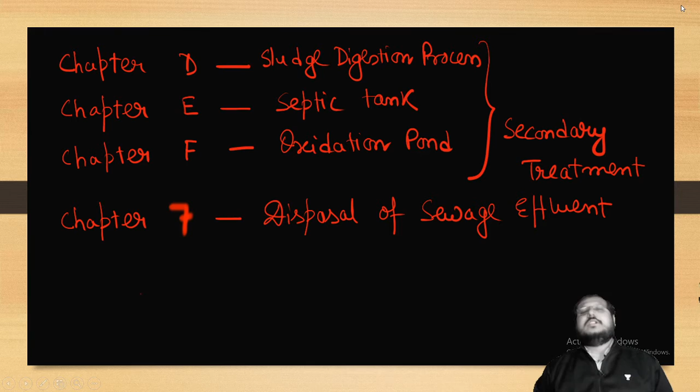So in this class we will discuss primary treatment completely, and we'll also go to a segment of activated sludge process. Let's go for the primary treatment.

What is primary treatment process? Primary treatment process comprises of screening, grit chamber, skimming tank, and primary sedimentation.

So what is screening? Screening is the first unit operation encountered by wastewater where large floating objects such as waste paper, plastic, cloths, glass bottles, wooden pieces are getting removed. That means it is actually nothing but a sieving process.

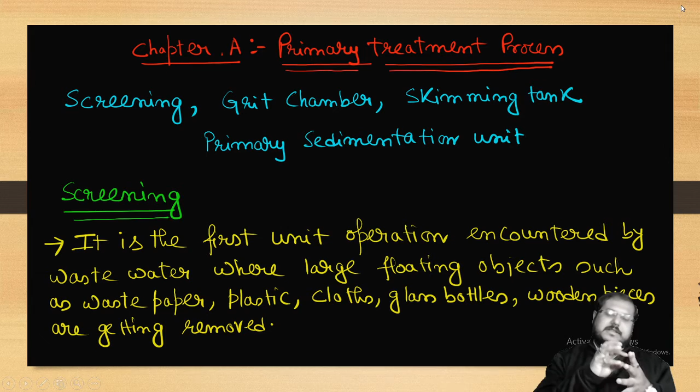When water is flowing, whatever the bigger size particle which is having higher pore size, higher diameter than the pore size will get restricted from the flow. It is the first unit operation encountered by wastewater where large floating objects such as waste paper, plastic, cloth, glass bottle, wooden pieces are getting removed. That is all about the screening process.

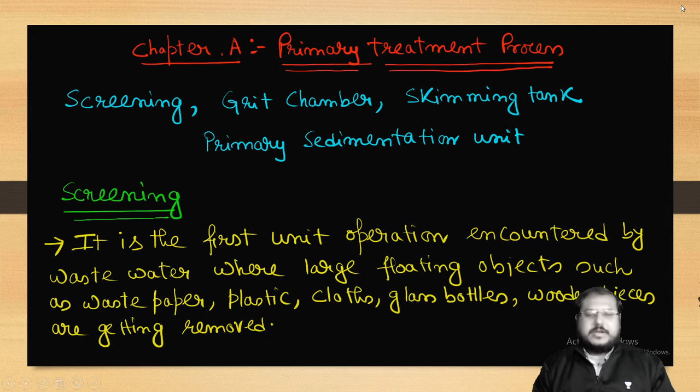Now, if they are not removed, then they will cause choking or clogging problem.

Screens are devices provided with uniform size opening, meaning if it is a screen, all the opening sizes will be same, and it is made up of metal rods or bars.

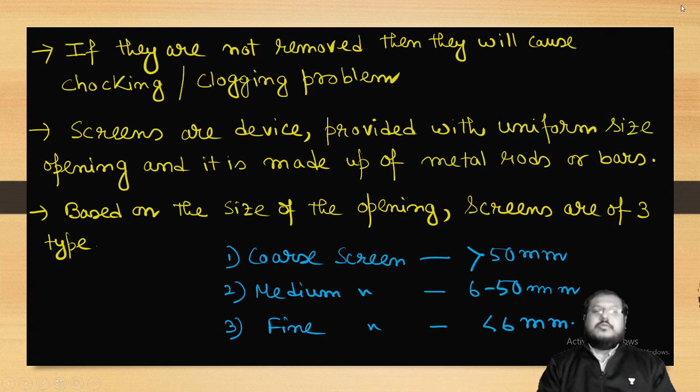Based on the size of the opening, screens are of three types: coarse screen greater than 50 mm diameter, medium screen 6 to 50 mm diameter, and fine screen less than 6 mm diameter.

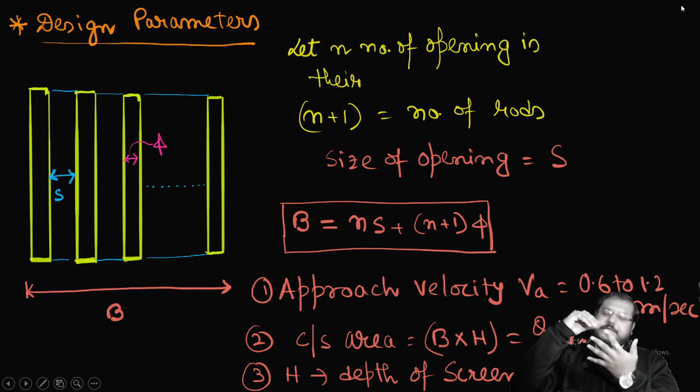Going for the design parameter: suppose n is the number of openings. So if your hand is a screen, here the number of openings is 3, but the number of rods is 4. If n is the number of openings, n plus 1 will be the number of rods.

The size of the opening is defined as capital S and the diameter of metal rods is defined as phi. So B, the width, equals to n into S plus n plus 1 into phi.

n is the number of openings, and n plus 1 is the number of rods, multiplied by phi. That also gives you B.

Approach velocity VA will be in between 0.6 to 1.2 meter per second. Cross-sectional area B into H will be equal to Q by VA. Depth of screen will vary in between 0.8 to 1.1 meter.

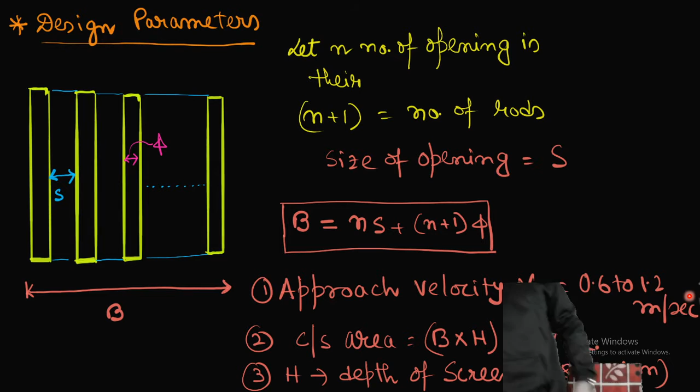So cross-sectional area B into H will be equal to Q by VA, where H is the depth of screen, which will vary in between 0.8 to 1.1 meter.

The separation velocity, defined as Vs, is the velocity at which the water moves away from the screen, that is defined as Vs.

The head loss due to the screening process will be defined as Vs square minus Va square by 2g into 1 by 0.7, where this 1 by 0.7 is called the screen parameter. As we know Va equals Q by cross sectional area, that is Q by B into H. Now what will be Vs? H, depth of screen, will be fixed, but B should be B dash. Now the question is, is B dash equal to B?

The answer is that B dash is not equal to B, because B dash is Ns. Why? Because when water is getting separated from the screen, it is only getting separated from the pores, not from the rods. So the total depth of the pores, depth meaning here B, with the pore will be B dash. So Vs will be equals to Q by N into S into H.

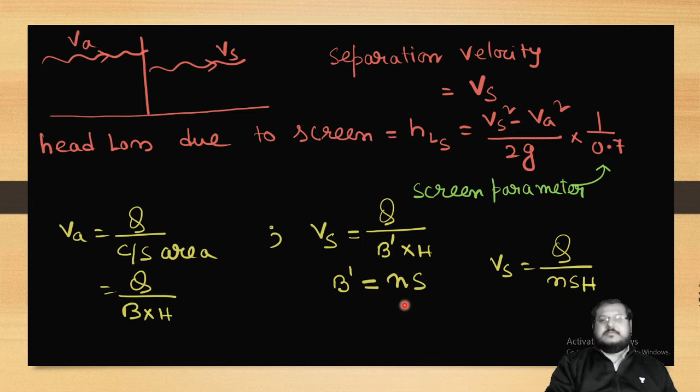Sometimes screens are provided with some angle theta. Why? Because if it is provided with some angle theta, then the modified separation velocity Vs will be Q sin theta by NSH. Why do we say this? Because when Vs becomes Q sin theta by NSH, the modified Vs value will be less than the original Vs, because the modified Vs has sin theta multiplied with the original Vs.

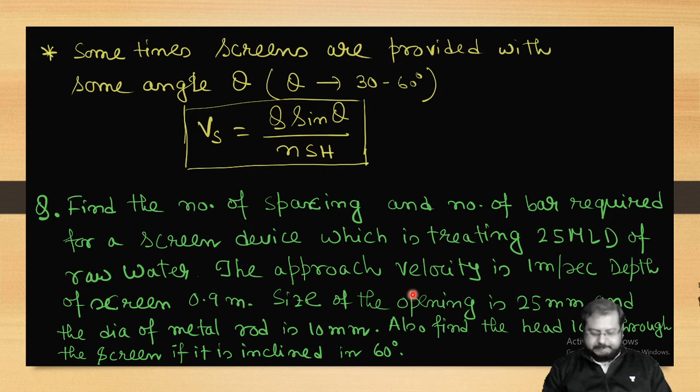Let's see the solution process.

HL is VS square minus VA square by 2G. VS is Q sin theta by NSH. So HL comes out as 0.0384 meter. Okay, that's it.

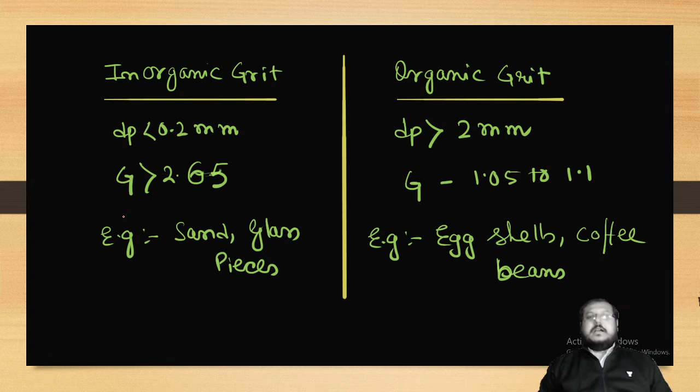The difference is: for inorganic grit, DP will be less than 0.2 mm, for organic grit DP will be greater than 2 mm. Specific gravity G will be greater than 2.65 for inorganic grit, and organic grit G will be between 1.05 to 1.1. For inorganic grit, examples are sand and glass pieces. For organic grit, examples are egg shells, coffee beans, etc.

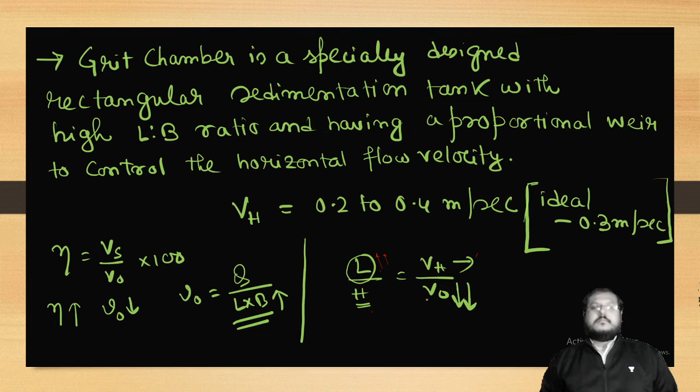The L/B ratio is generally varied between 6:1 to 8:1. Detention time will be between 1 to 3 minutes. Height of the tank will be between 2 to 4 meters, and volume of tank will be defined by Q into dt.

Q into dt is volume of tank, and length of tank will be given by VH into dt, horizontal flow velocity into retention time. It is volume of tank.

What have we seen so far? We have seen Hazen's equation for settling velocity in the laminar flow region, and modified Hazen's velocity in the transitional flow region. Now we are observing the modified Hazen's equation for the grit particle. Is that clear?

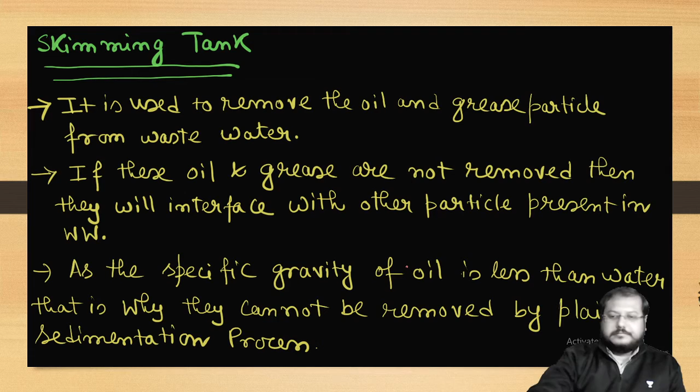In skimming tank, hot air will be blown from the bottom of the tank, which will take the oil and grease particles to the top of the water surface as gas bubbles.

Now, the surface area of skimming tank. Here a flotation technique will be used. The surface area of skimming tank will be given by AS = 0.00622 Q by VR.

In skimming tank, hot air blown from the bottom takes the oil and grease particles to the top as gas bubbles. Here Q is the wastewater flow rate in meter cube per day, and VR is the liquid rise velocity in meter per minute. Retention time of the skimming tank will vary between 3 to 5 minutes.

Retention time for the skimming tank will vary between 3 to 5 minutes.

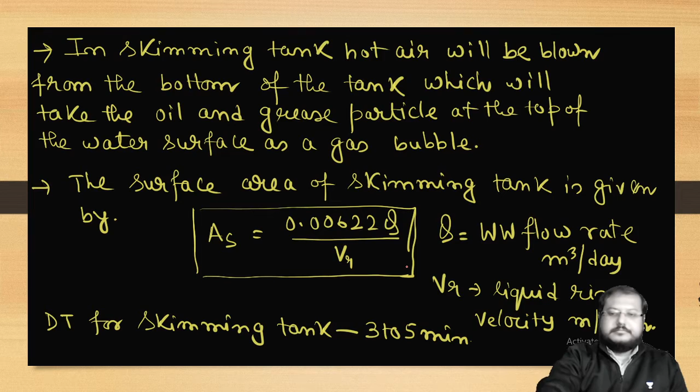The next component of primary treatment is: after completion of all preliminary treatment, the water is transferred to a sedimentation tank called the primary sedimentation unit for a detention period of 2 to 3 hours.

What will happen in this unit? Type 3 settling, or hindered settling, will be observed. As the particles are hindered particles, they continuously change their shape and size and are brought down to the bottom as hindered particle, type 3 settling.

That is all about the primary sedimentation segment. We have quickly finished this because it is only the prelude of the wastewater treatment process.

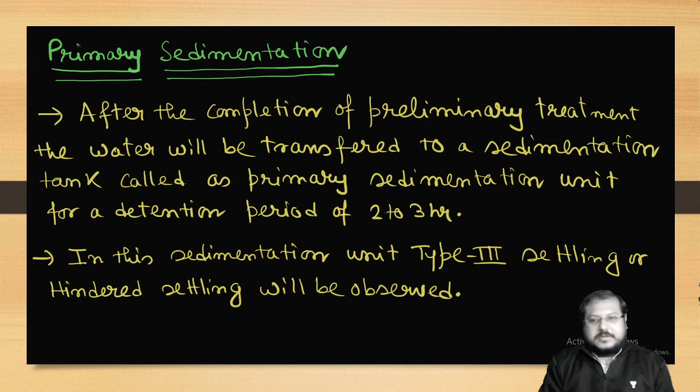Next we will go for the activated sludge process. This is biological treatment, a major treatment process - the biological treatment process.

In the biological treatment process, complex matter will be acted upon by microorganisms, which will give you gases, energy, H2O, and biomass. These microorganisms are heterotrophic microorganisms. What is a heterotrophic microorganism? Those microorganisms which cannot produce their own food.

If a microorganism can produce its own food, it will be called an autotrophic microorganism. The complex acted upon by microorganisms will give gases, energy, H2O, and biomass. What is biomass?

The question is, what is biomass? Biomass should ideally be the dead cells of microorganisms, but actually it is the summation of dead cells and living cells that remain - the percentage of dead cells should be more, but ideally it should be all dead cells, though actually it's dead cells plus living cells.

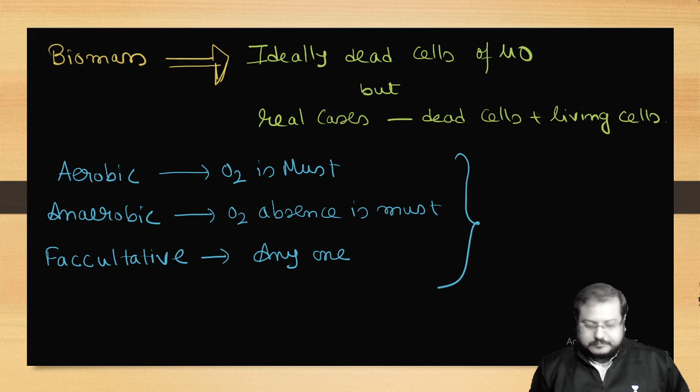This decomposition process will be of three types: aerobic, anaerobic, and facultative. In aerobic, oxygen presence is a must. In anaerobic, oxygen absence is a must. And in facultative, either of these can happen.

In the aerobic process, complex is acted upon by microorganisms in the presence of oxygen, producing carbon dioxide, water, energy, and biomass. Whereas in the anaerobic process, complex is acted upon by microorganisms in the absence of oxygen, producing methane, ammonia, H2S, and energy.

The aerobic process is a fast process, whereas the anaerobic process is a very slow process. We know that whatever is fast will be less efficient. So the anaerobic process is slow, but it is more efficient.

This aerobic process will be of two types: suspended growth process and attached growth process. In the suspended growth process, you can take the example of making tea from a tea bag.

We put the tea bag in suspension with hot water or hot milk. The tea leaves are in suspension with the hot water or milk, and then we get the liquor. That is the suspended growth process.

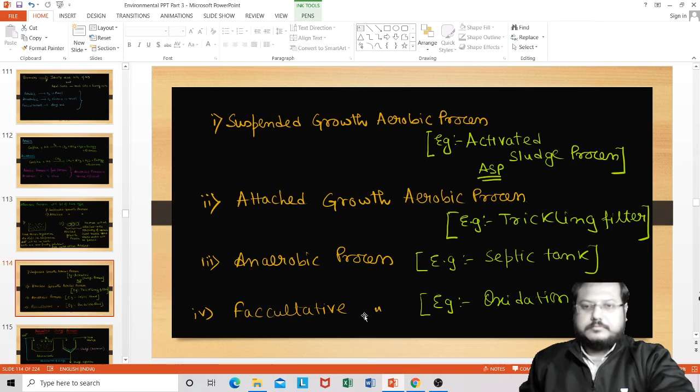We are going for the activated sludge process.

First of all, in activated sludge process, there will be a tank called the aeration tank, which is an example of a suspended growth aerobic process. The microorganism mass will be in suspension and oxygen will be supplied from outside. Wastewater is kept there, and after a certain time, it is transferred to the secondary sedimentation tank, where it gets stabilized. From the top we get clear water, and from the bottom we get sludge or biomass. A portion of this sludge is taken out, and part of that moves back to the inlet. The rest goes for sludge digestion. That is the activated sludge process.

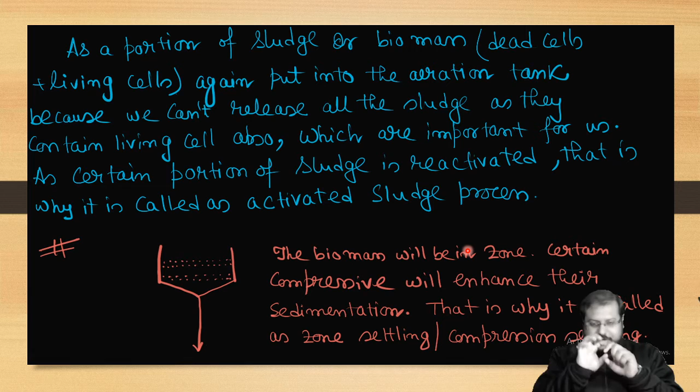If you put extra pressure, it will settle down, like this biomass in zone. A certain compressive force will enhance their sedimentation process.

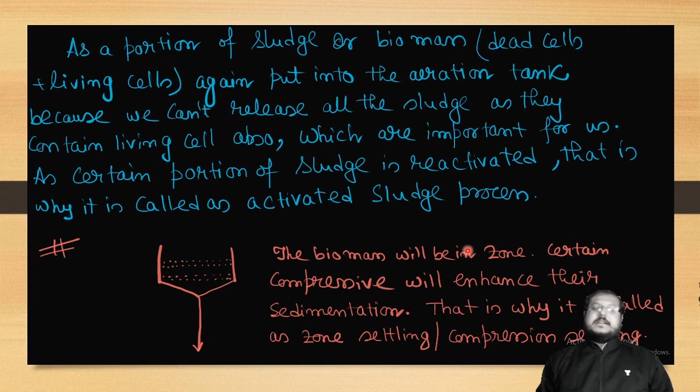That's why this is called zone settling or compression settling, as the biomass will be in a zone and compressive force enhances their sedimentation process.

Now, one thing I should tell you: the way I deal with this activated sludge process, please follow in that manner only. Remember the notation exactly as given - if QR is this, then represent it as QR, not as SR or VR or LR or anything else. First, the schematic is drawn here, and I will explain all these parameters, then move to the design parameters of the activated sludge process.

Before going to that, have a look at this.

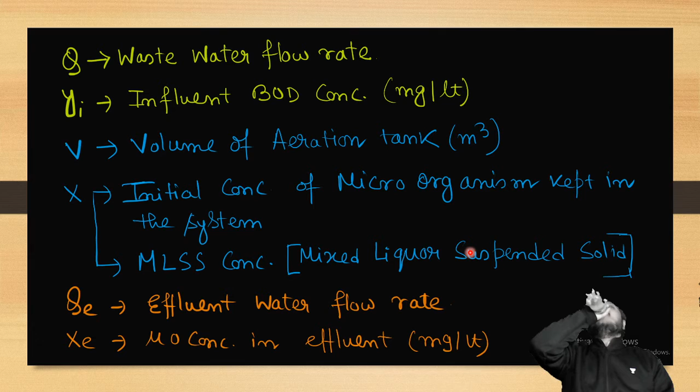X is the initial concentration of microorganism kept in the system, also called as MLSS concentration, because this is nothing but the suspended solid mass mixed with water. That's why it's called mixed liquor suspended solid, or MLSS concentration.

QE is the effluent water flow rate, and YE, since the process is not 100% efficient, is the effluent water BOD. What is XE? A certain portion of microorganism will be there, maybe very less or zero, but there is a chance you can get one or two in the effluent wastewater. So XE is the effluent water microorganism concentration.

Now from the bottom part of the sedimentation tank, you will take out the underwater. QU is the underwater flow rate, and the underwater solid concentration is provided by XU.

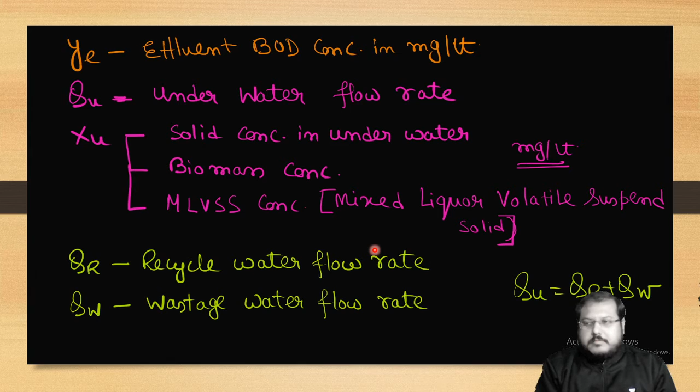Now we are going for the design parameters. First design parameter is F by M ratio, food to microorganism ratio.

What is F by M ratio? It is the mass of food applied to the reactor divided by the mass of microorganism present initially.

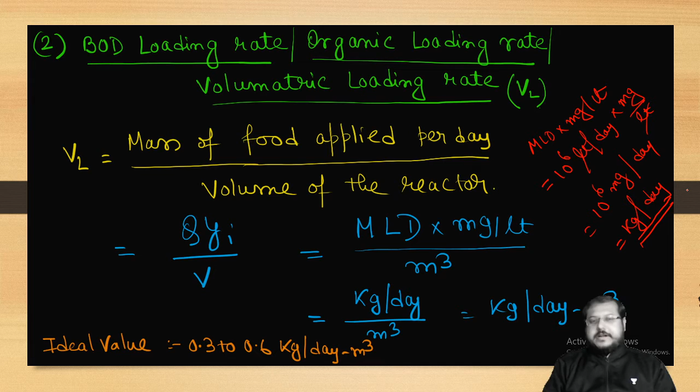MLD into milligram per liter will be kg per day. So Q into Yi is MLD into milligram per liter by meter cube, giving kg per day per meter cube. The ideal value will be 0.3 to 0.6 kg per day per meter cube.

So for F by M, your Q will be in meter cube per day. Then you will be safe enough for the unit conversion.

The third parameter is BOD removal efficiency, defined as Yi minus Ye by Yi into 100. Generally, BOD removal efficiency is written as 85 to 90%, but in practice it will be around 90 to 92%.

Then we go to detention time, defined by V by Q. Detention time will vary in between 4 to 8 hours.

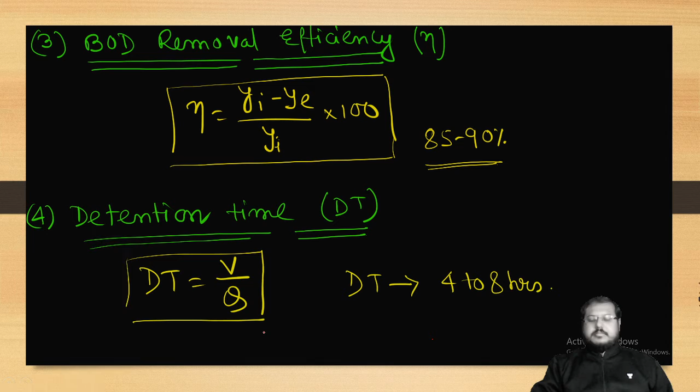Next is mean cell residence time, MCRT, also called sludge age or theta c. It is defined as the theoretical average time for which a microorganism stays in the system.

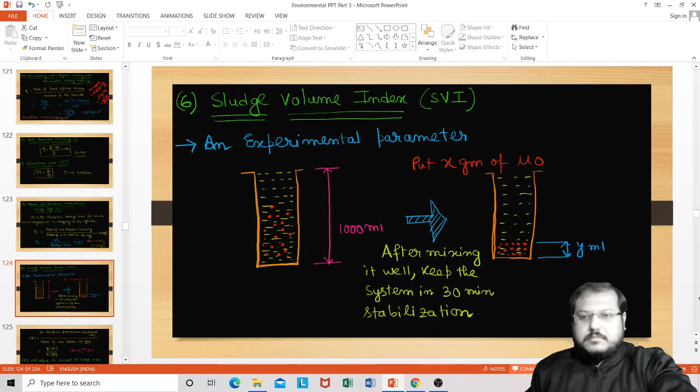The sixth parameter is sludge volume index. It is an experimental parameter, and you need to understand it carefully. It is an experimental parameter and generally cannot be found from the tank itself - you have to experiment it.

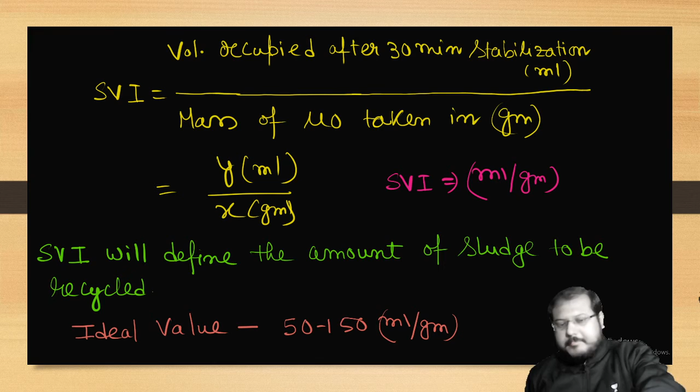Now, how does it define the recycling process? Suppose there is a young microorganism, denoted here in this segment.

One young microorganism is there of mass X. When the same microorganism gets old, this fluffiness will be there. For human beings, fluffiness can be there in the body at any age. But for microorganisms, fluffiness will be there when they grow old and are about to die.

Mass will be same. So in the first case, if SVI 1 is for this microorganism occupying Y1 volume, this is SVI 2, with Y2 by X. So both...

When comparing these two, SVI 1 and SVI 2, since Y2 is greater than Y1, SVI 2 is greater than SVI 1. The higher value of SVI defines what?

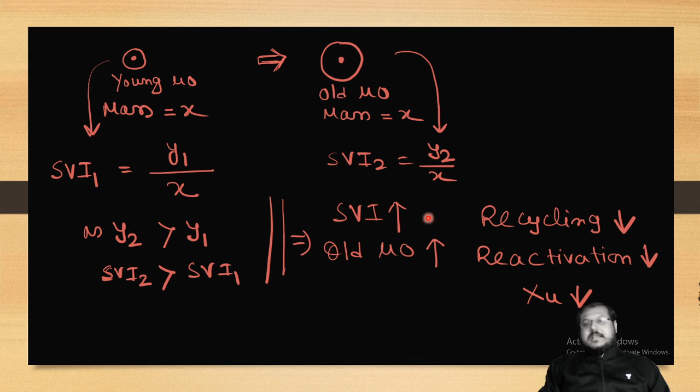Higher value of SVI means old microorganisms are more in the system. So if old microorganisms are more in the system, what is the point of recycling? Since they are about to die, giving them another chance has no benefit. So when old microorganisms are higher in the system, recycling will be less and reactivation will be less.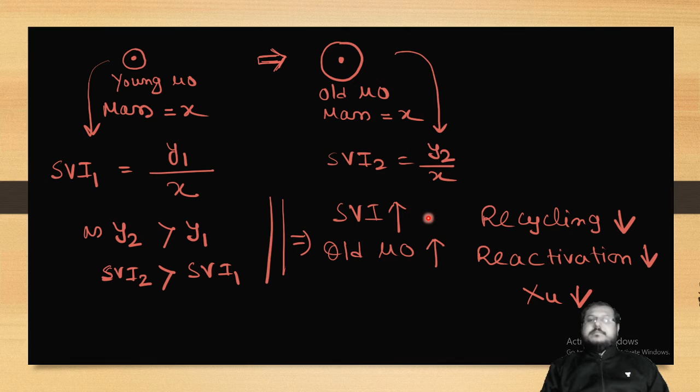When the old value of microorganism is higher, obviously higher SVI will lead to less recycling and less reactivation. Recycling less, reactivation less means recycling concentration XU will also be less. Yes or no? Recycling concentration XU will also be less.

So if XU is less, that means SVI is inversely proportional to XU. XU is in milligram per liter, so 1 by XU is liter per milligram. From here it becomes 10 to the power 6 milliliter per gram, which is the SVI unit. So we write SVI equals 10 to the power 6 by XU.

Now the term recycling ratio R is defined by QR by Q. Mathematically, R equals X by XU minus X, or X by 10 to the power 6 by SVI minus X. Generally, R value varies between 0.25 to 0.5.

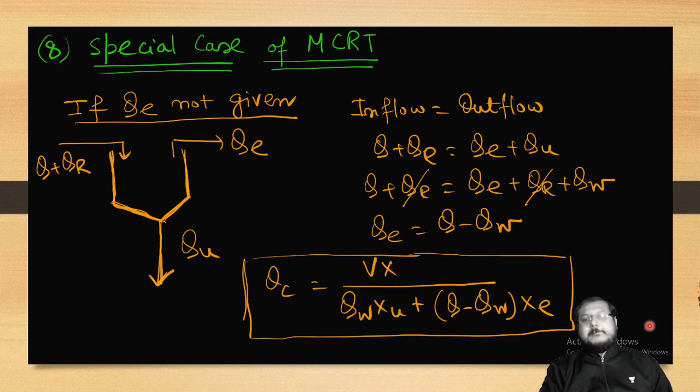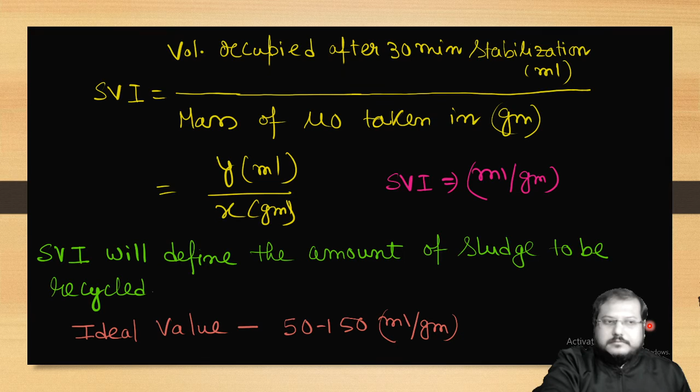Now we'll solve one question. Let's just go through the process once again. There's a schematic of ASP.

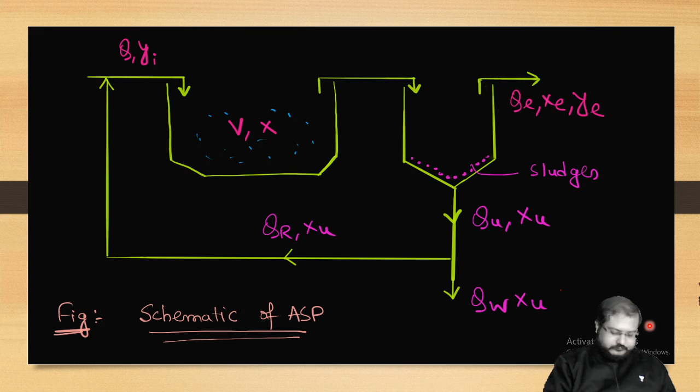This is the schematic explanation.

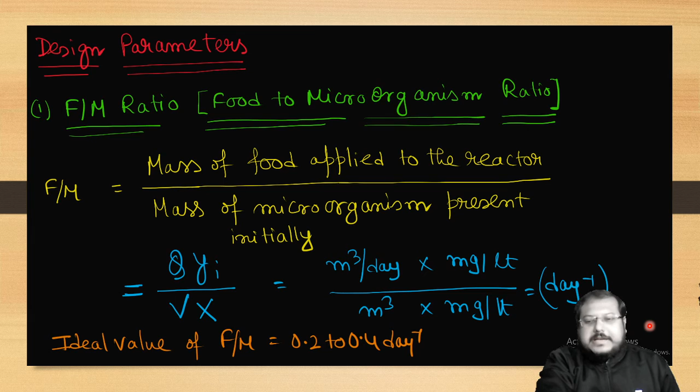F by M ratio is Q YI by Vx, where Q will be in meter cube per day, YI and X will be in milligram per liter, and V will be in meter cube. F by M unit is day inverse. Then there's BOD loading rate, also called organic loading rate or VL.

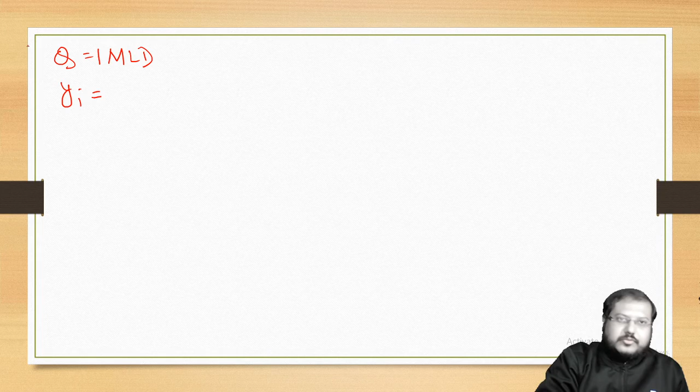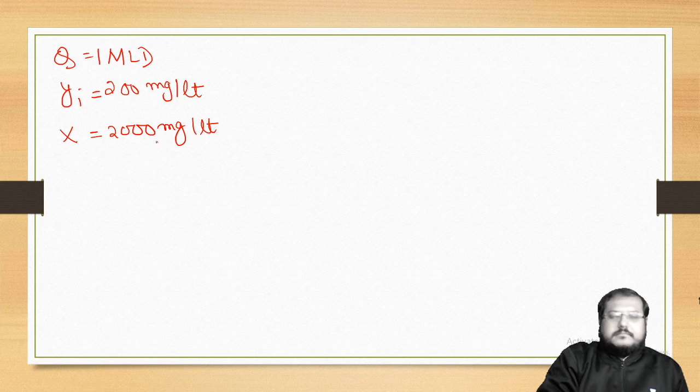Q is 1 MLD. What is YI? The microorganism concentration initially is 2000 milligram per liter and leaving with effluent is 50 milligram per liter. So YI is 200 milligram per liter. Microorganism present initially is 2000 milligram per liter, removed from the effluent is 50 milligram per liter.

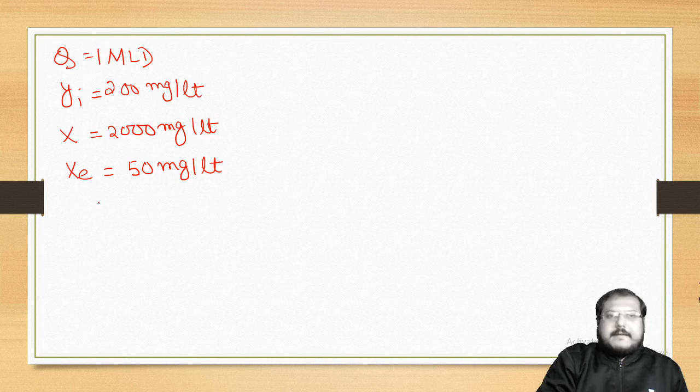Volume is 200 meter cube. They're asking for detention time. Now the first question they are asking is detention time. What is detention time? V by Q. What is V? 200 meter cube.

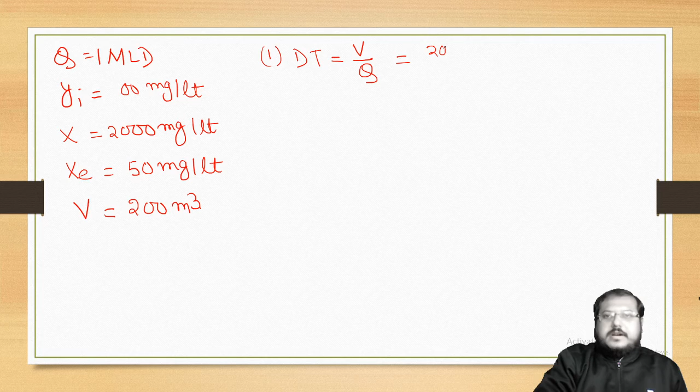So 200 into 10 to the power 3 liter by 1 into 10 to the power 6 liter per day, and after cancelling it will be in days. It's actually 0.2 days. This equals 0.2 into 24, which is 4.8 hours.

Second part of the question is, what is the average time for which microorganism is staying in the system? This is nothing but theta C. What is the theta C formula? It is Vx by QW XU plus QE XE.

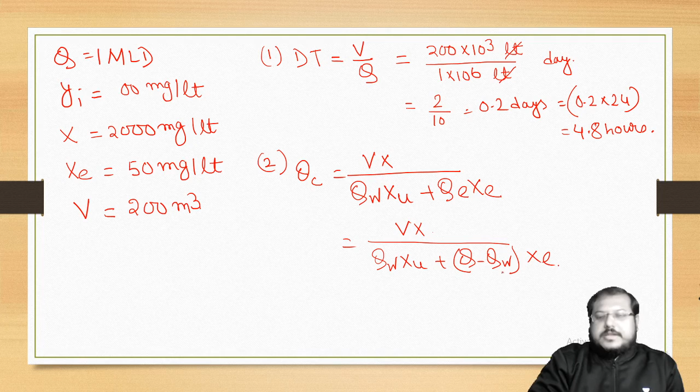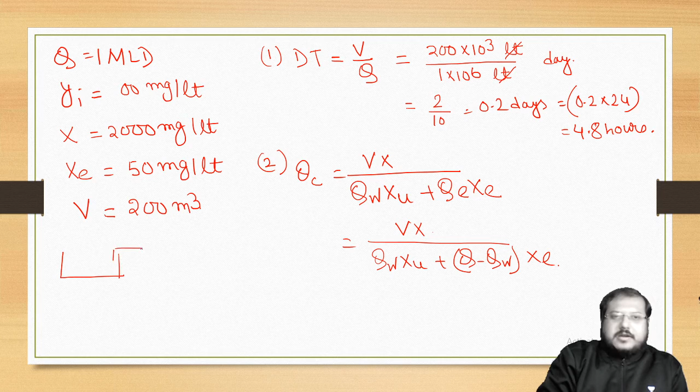See, you need to check the statement: completely mixed. Completely mixed means what? Whatever is the sludge, this is your sedimentation tank. What is going to the secondary sedimentation unit? Effluent. Whatever sludge you are taking out is getting recycled.

So nothing is there, so QW is 0. Why? As it is completely mixed.

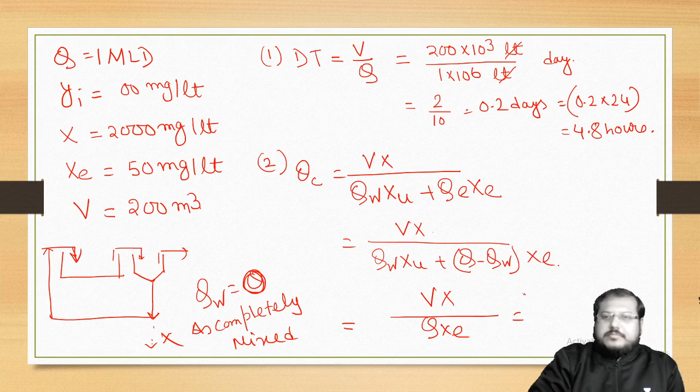Vx by Q into Xe. V is 200 meter cube, so 200 into 10 to the power 3 liter, X is 2000 milligram per liter. So what is milligram by Q? 1 MLD is 1 into 10 to the power 6. Xe is 50.

Final answer will be 8 days. Clear? That is the solution of this question, 8 days.

Okay. Now we are going for certain special cases of the activated sludge process. What are the cases?

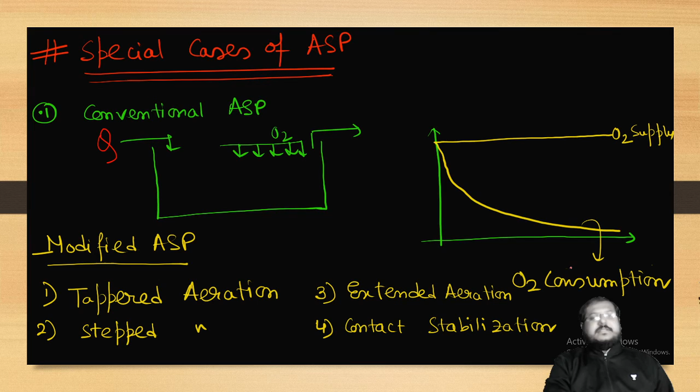To remove this gap, four types of modifications will be there: tapered aeration, stepped aeration, extended aeration, and contact stabilization. The first two, tapered and stepped aeration, will optimize the oxygen supply. The third and fourth, extended aeration and contact stabilization, will be used to increase performance.

In tapered aeration, what happens? The whole oxygen supply will not be done at once. It will be done in 3 segments: 60% of the oxygen first, then 30%, then 10%. So there will be oxygen supply, then decrease, then oxygen supplied again, then oxygen supply - so the gap will get reduced. That is the tapered aeration process.

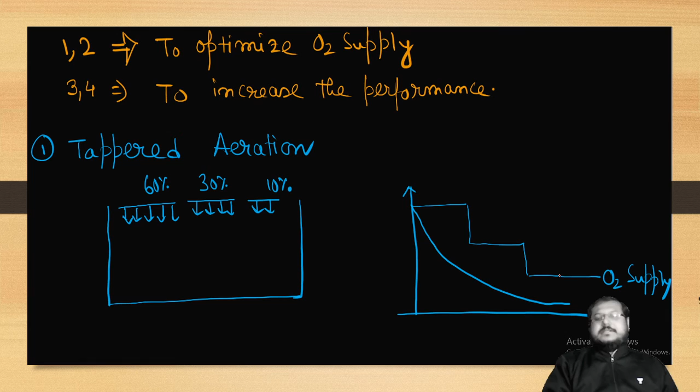In stepped aeration, oxygen will be supplied constantly, but the organic loading will be done at different points, not all at once. Q is applied, Q value is increased, then it gets decreased, then Q is applied again - this is called stepped aeration.

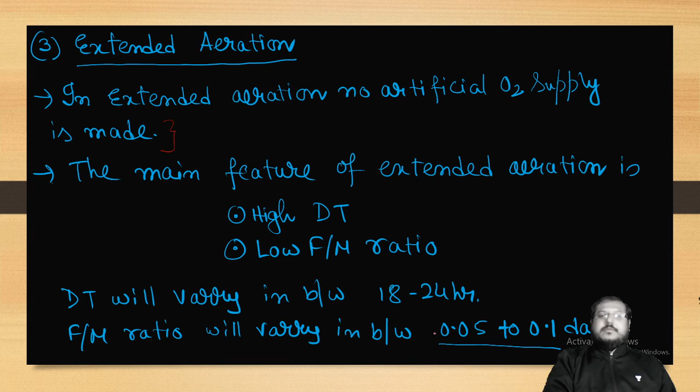Now extended aeration. In the extended aeration technique, no artificial oxygen supply is made. The main feature of extended aeration is high retention time and low F by M ratio. Retention time will vary between 18 to 24 hours, very high, and F by M ratio will be 0.05 to 0.1 day inverse. That is one process.

And the reactor which follows the extended aeration technique is called an oxidation ditch.

Finally, contact stabilization, which is to enhance performance. Nothing else is there - the recycled sludge, before putting into the inlet of the aeration tank, is getting aerated in another tank, which is called the contact stabilization unit. That is called contact stabilization.

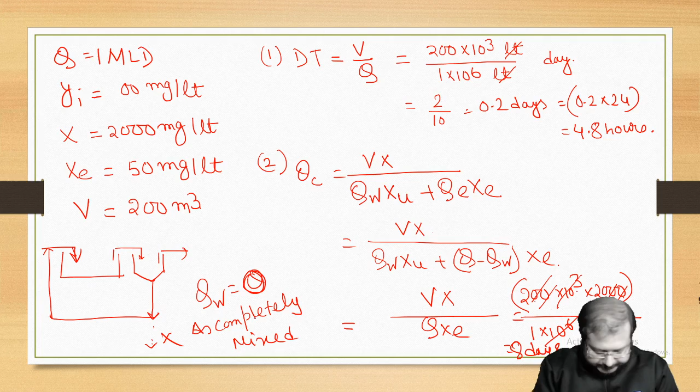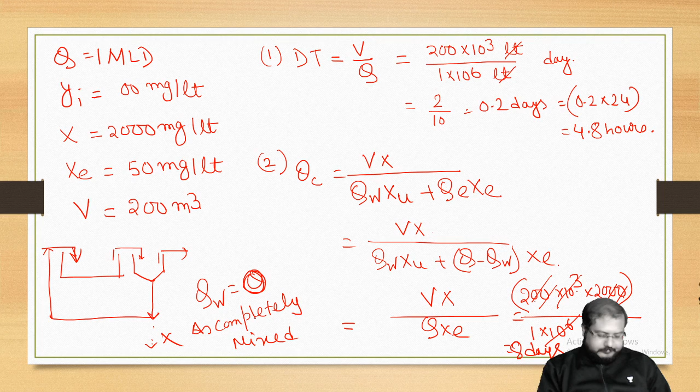The solution. The special cases of ASP.

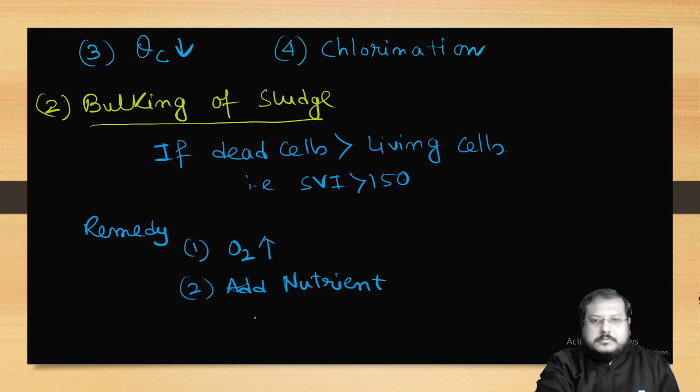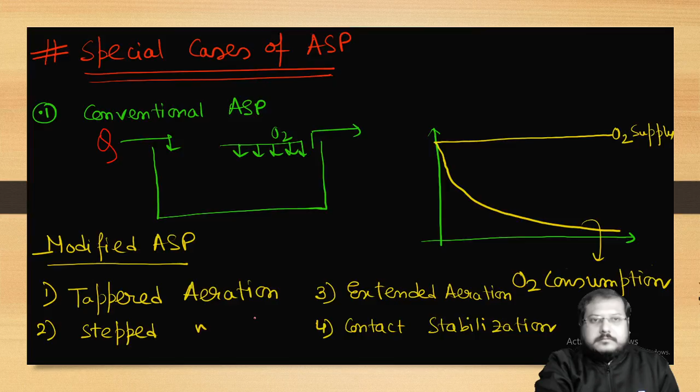Well, so that's the end of activated sludge process.